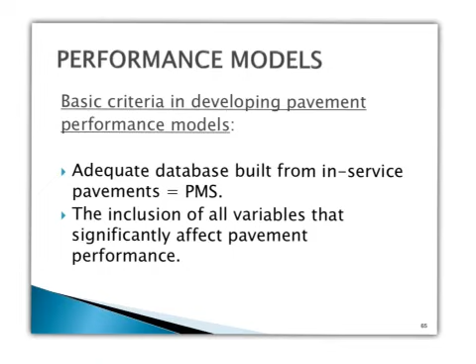Also, when thinking of performance models, we need an adequate functional form of the model—one that meets proper statistical criteria for precision and accuracy. I can't just come up with a model and claim it's accurate and stop there; I need to show the model's performance.

Do predictions based on this model match the true performance? Do the statistics show this is a significant model that can be safely used to predict future performance? What's the R-square? What's the amount of variability built into the model?

Precision and accuracy criteria are essentially about error prediction, and at the end of the day you look at the coefficient of determination, the R-square. If R-square approaches 1, or 100%, the relationship is very strong and has high accuracy for predicting future performance.

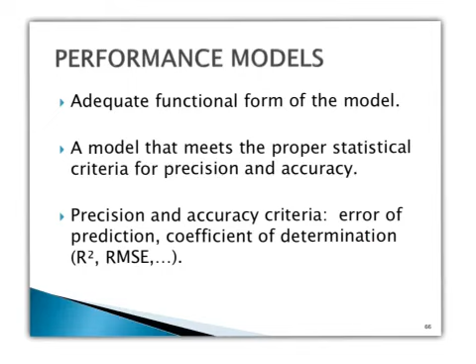On the other hand, if a relationship has an R-square of 0.3 or 0.2, that's a statistically poor relationship, and depending on that, the model becomes questionable and would not be preferred. So while developing performance models, there are two different ways of looking at their development.

The first is deterministic analysis, basically a regression model that predicts a single value of something. If it's based on mechanistic response, it's called mechanistic. So there are two major groups: deterministic and mechanistic.

Another term you'll see in the literature is performance-based models. These typically use a performance response of the pavement related to design, traffic, and environment. They're used heavily by Washington DOT and Nevada DOT, where field measurements of traffic, environmental information, and design thicknesses are taken to develop a performance-based model.

Mechanistic-based models are more robust, using the mechanical response of the pavement to relate to pavement life, such as the NCHRP cracking and rutting models. If you Google NCHRP cracking and rutting models, you'll find extensive work from the last 10 years relating stresses, strains, and stiffness. These are physical components and inputs that let us predict pavement life more accurately than performance-based models.

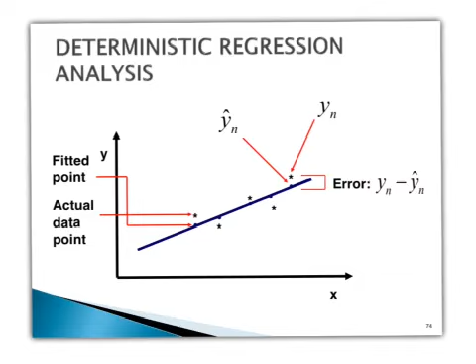Based on the regression line, we need to calculate the coefficient of determination, or R-square. R-square is simply a measure of how much of the data can be explained by the model. If I have a perfect fit, the model can explain every single measured data point, leading to R-square equal to 1. High values are preferred, and R-square somewhere between 0.65 and 0.85 is expected based on actual pavement management system data. We're not going to get a perfect relationship with R-square equal to 1, but something between 0.65 and 0.85 would be really good.

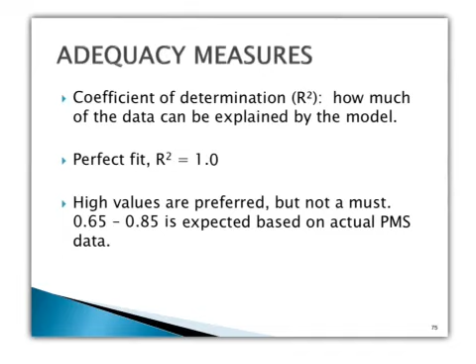Another adequacy measure for how good your developed model is, is the root mean square error, RMSE. Low values are preferred to give an indication that this developed model is really good.

We also like to do verification sections. Those verification sections are not used to develop the model, but are used to develop comparisons of the predicted and measured performance. Let's say I'm having 100 data points to start with. Typically I would use 75% or 75 points to generate the regression model, and then use the rest, 25 points, for verification. After developing the model, I use it to predict those 25 points and see how close or far I am from the true measured values. This verification section should be from outside the database used to develop the model.

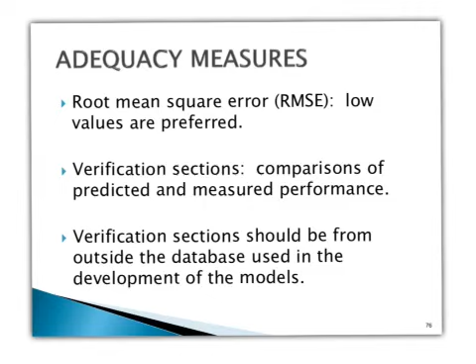One thing also that we need to keep in mind as a measure of engineering adequacy is engineering judgment. We always have to keep this in mind, and every one of you will establish your own judgment based on some fundamental engineering checks.

For example, pavement condition drops with higher traffic or more years - it's never going to go up. Pavement performance, as a reminder, is this relationship going all the way down with time. So it always goes down with time. If I see something going up, that means something is wrong, or there was a major rehabilitation.

Also, pavement condition drops with severe environmental conditions. If I have a very bad winter with lots of snow and freezing and thawing affecting the pavement structure, all of a sudden the pavement performance is dropping more and more for that particular year. So that's also something to keep in mind.

As a general rule, the fewer the number of variables, the better the applicability. A significance test should be conducted to eliminate non-significant variables. Typically at the beginning we don't know how many independent variables, the x's, need to be included in the model, but fewer is better, because depending on 2 or 3 x's rather than 10 makes it easier to come up with an accurate model. With too many variables, each has inherent variability, and the R-square would be less and less.

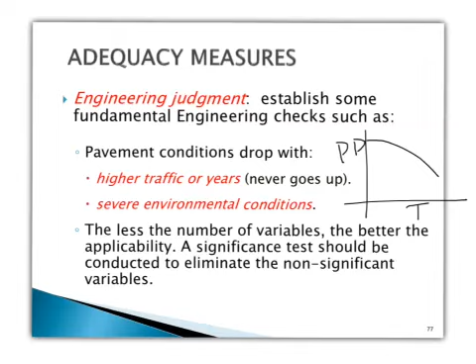This is something we need to keep in mind while developing regression analysis models - we always have limitations on real data. Sometimes we call this the diagonal problem. For example, with traffic we always have light, heavy, and medium traffic, and the corresponding thickness for the hot mix asphalt also has to be between thin and thick. So in the PMS system, with light traffic we design pavements to be thin, while with heavy traffic we always have thick pavement. That's why your data is really along this diagonal, and it's very rare to see a thick pavement with low traffic or a thin pavement with heavy traffic. That's also something to keep in mind.

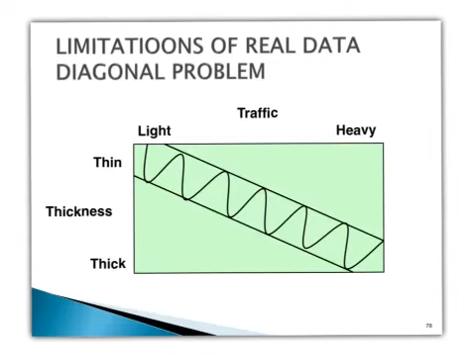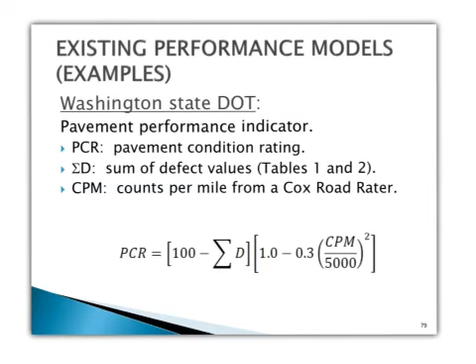It consists of the summation of D, which is the summation of defect values found in tables I'll show you in a minute, as well as the CPM - counts per mile from a Cox road rater. Once we have those two, and you can read more about it on their website, we're able to get the PCR.

This is Table 1 under their system - flexible pavement defect deductions for PMS. They have alligator cracking, longitudinal cracking, transverse cracking, and patching.

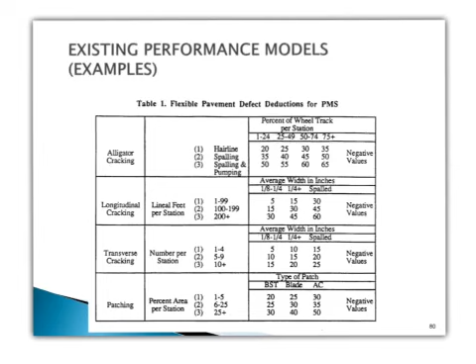Now they show how to distinguish alligator cracking - whether it's just a hairline, or whether it comes with spalling, or spalling and pumping. Afterwards you go to the part of the table for percent wheel track per station. If it's 1 to 24%, that's the deduct value; if it's 50 to 75%, it's 30 rather than 20. All of those are negative values to be considered in the previous equation.

Same thing for Portland cement concrete - the deductions for PMS.

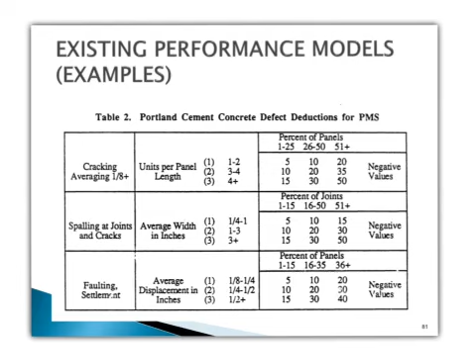Also here we'll talk about basic performance models at the project level. They have this equation: PCR equals C minus M times age to the power P, and this is only applicable for overlays and new constructions. M and P in the equation are changed until the best fit is achieved, typically determined by the highest R-square and the lowest RMSE.

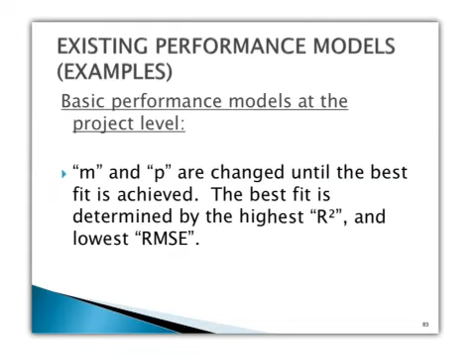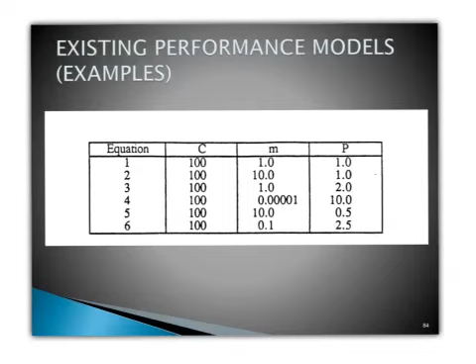This is how to get C, M, and P - they have 6 equations depending on the case. Once you know C, M, and P, you'll be able to get the PCR predictions. Here are the 6 equations. Equation 6 is more typical of the performance of a thin asphalt concrete overlay.

So it's a simple equation, as you can see - it's just 100 minus 1 times age to the power 1. Here you'd see the PCR goes from 100 all the way down to 80, with the corresponding age in years.

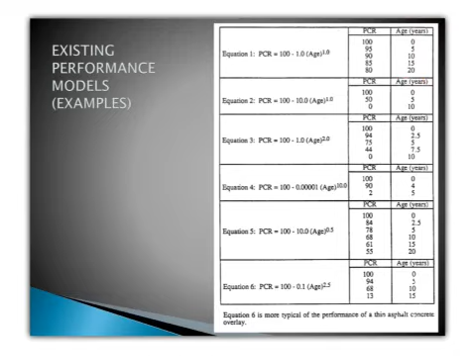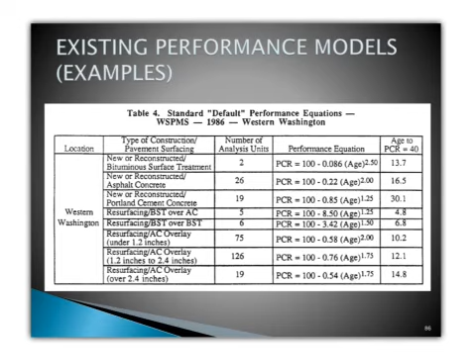Another table under their system, this is the standard default performance equations. You've got one of the locations, Western Washington, and in the second column you see the type of construction or pavement surfacing, and then the number of analysis units. Those are the performance equations, and this is the age to PCR equal to 40. Again, this is just an example, I'm not expecting you to know more about it, but just to give you an idea what type of models can be developed - simple models related to age right away, rather than a long model that can be hard to understand or not accurate.

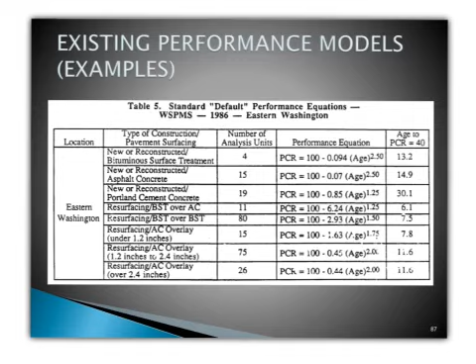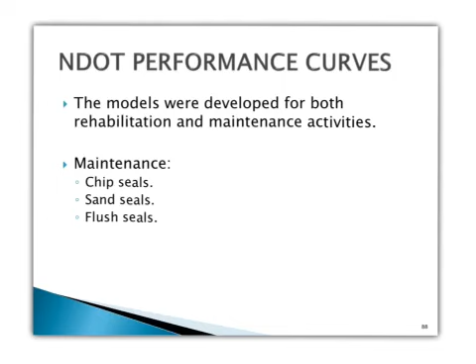Another example here for the performance models or performance curves is from Nevada DOT. Those models were really developed for both rehabilitation as well as maintenance activities, not for new construction. So when I say maintenance activities, it included 3 options: chip seal, sand seals, and flush seals. When it comes to rehabilitation, it included overlays, road bed modification, all the way to mill and overlay.

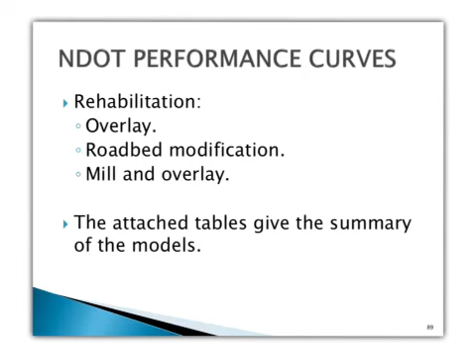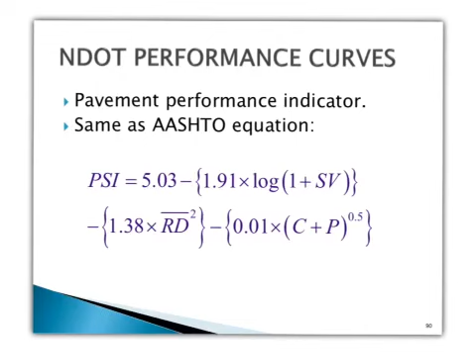The attached tables that I'm going to show you give you a summary of the models. The very first thing here is the pavement performance indicator, similar to the AASHTO equation: PSI equal to 5.03 minus 1.91 times log times 1 plus SV, slope variance, minus 1.38 times RD, this is the rutting depth, minus 0.01 times C, which is cracking, plus potholes, to the power 0.5. This is another example here.

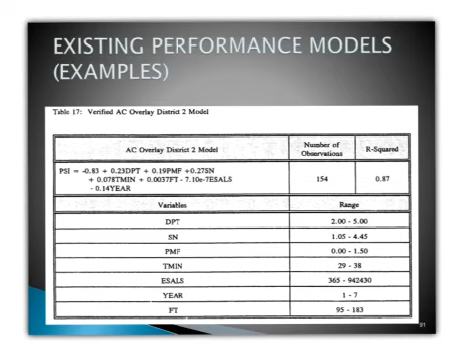This is table 17 for verified AC overlay for District 2 model. Again, this is just an example, I'm not expecting you to know a lot about it, but the PSI equation here is a long equation with several variables, each with its own range. The good thing here is we're showing the developed regression model, and how many points were used to develop it - 154 points - and the associated R-squared is 0.87, which is really quite accurate. So this is a good illustration of the models that were developed, the variables used, the ranges, as well as the R-squared and number of data points - a good summary of all what you need to show when developing a regression model.

Another example here is for a statewide milling model. So instead of just district-applicable models, they were able to come up with one model for the entire state when it comes to milling jobs. So it's PSI, and it has so many variables, along with the ranges, and they used 86 data points to develop this model, and the R-squared wasn't too bad, it's 0.65.

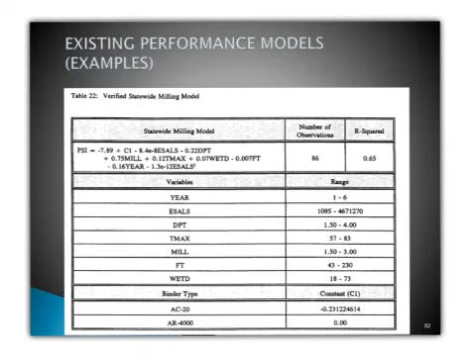Another table here for road bed modification just for District 2. The model again is PSI, in terms of so many variables, including years, ESALs which is equivalent single axle load, SN structural number, the maximum temperature, the minimum temperature, as well as the number of observations - 194 points - and R-squared is 0.79.

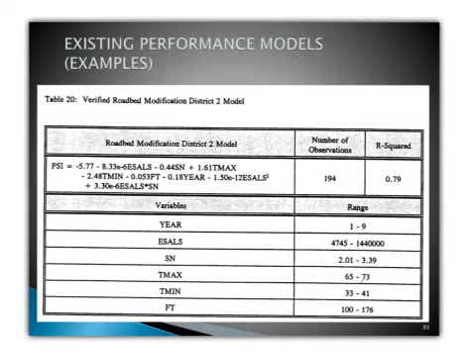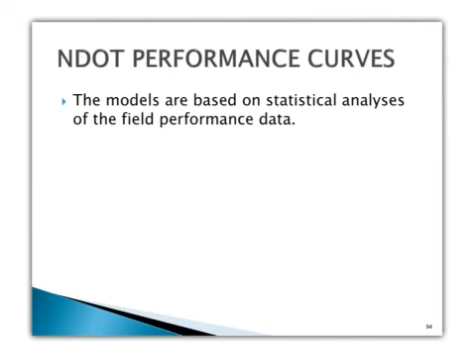As you can see, the models were really based on statistical analysis of the field performance data. So the major goal is for you as a pavement management engineer to keep collecting data either every year or every other year to have a good and reliable database, which is going to allow you to come up with an accurate performance model. Those models that can predict pavement performance life based on mechanistic response of pavement structure due to load and environment are much stronger.

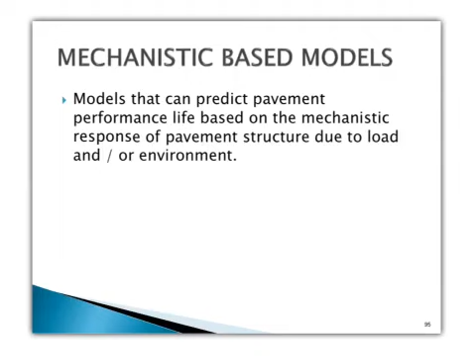So now we're shifting gears from regression models to mechanistic models. Mechanistic models are more accurate, as I mentioned before, and they depend on the true physical performance of the pavement, such as stresses, strains, and stiffness.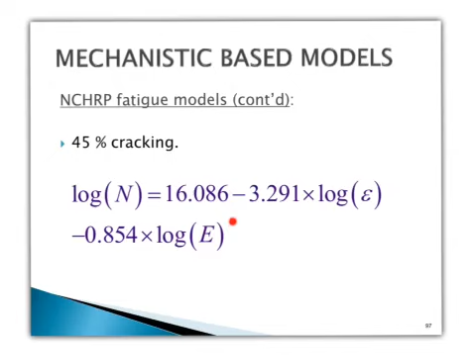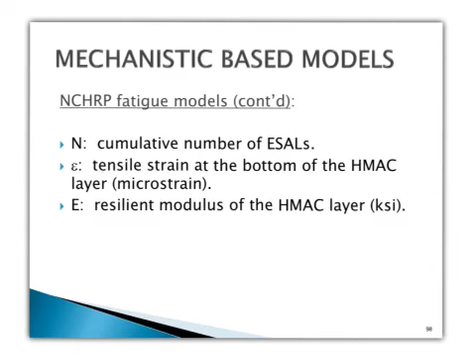So N, as I mentioned, this is the cumulative number of ESALs, or equivalent single axle loads. Epsilon is the tensile strain at the bottom of the hot mix asphalt layer in microstrains, and E is the resilient modulus for the hot mix asphalt layer, measured in KSI.

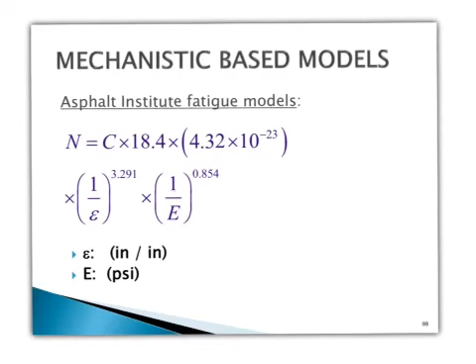There is another institute called the Asphalt Institute Fatigue Models. So now they developed this unique model that has N, which is number of cycles to failure or ESALs, and it's in terms of, again, epsilon, which is strain, and E, which is the stiffness or strength of the hot mix asphalt modulus. C is another coefficient that was defined later on. But as you could see, again, this can be called a mechanistic based model simply because I'm not measuring cracks and other variables from the field. I'm really measuring strain and stiffness and relating that directly to how many cycles to failure.

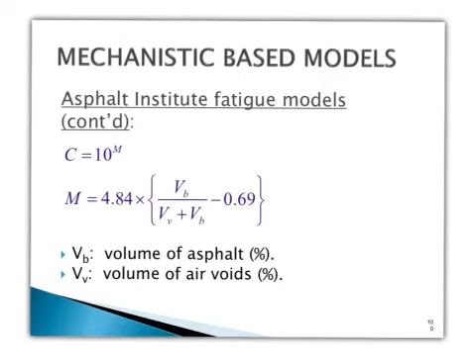So the C variable that we talked about in the previous equation is equal to 10 to the power m, and m is a function of the volume of asphalt, which is VB, and the volume of air voids. Once I know the volume of asphalt and the volume of air voids, I'll be able to predict m, and m now is going to be the power for 10 to the power m to get the C.

Another model for rutting, this time not for fatigue. Chevron, which is an oil company, sponsored some research to come up with a predictive equation for rutting. And rutting also can be related to how many cycles do I need to apply, or how many ESALs do I need to apply on the street till I reach the maximum amount of allowable rutting.

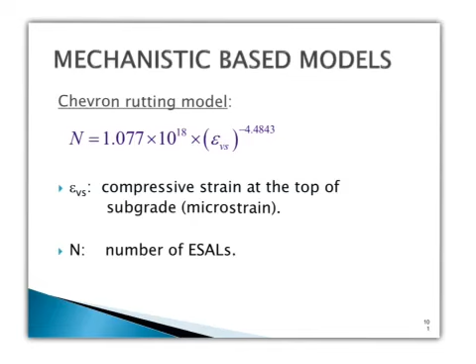So N here is number of ESALs, and epsilon Vs is basically the compressive strain at the top of the subgrade in microstrain. This is just a reminder that the critical strain we use for fatigue is different than what we use for rutting predictions. The strain for fatigue prediction is at the bottom of the hot mix asphalt, because this is where fatigue is going to be generated. While here, for rutting, we are interested to get the compressive strain at the top of the subgrade, where the rutting, sometimes it's very high at this point, all the way to the surface of the pavement.

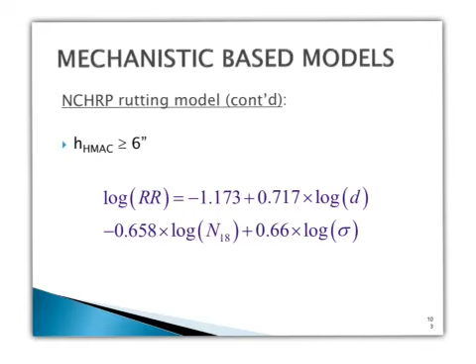Otherwise, I will go to the next page to see the other model, which is applicable for hot mix asphalt thicknesses more than 6 inches. As you could see in this model, it's trying to predict the rutting. Those are the variables that I mentioned or showed in the previous two slides.

RR, this is the rate of rutting, which is 1 times 10 to the power minus 6 inch per repetition. D is the surface deflection. N is the number of 18 kips, which is the ESALs, times 10 to the power 5. And what's the most important thing, and this is what makes this model mechanistic, is sigma. Sigma is the compressive vertical stress at the surface-base interface. So once I am interested to measure the vertical stress at the surface, between the surface and the base interface, then I can correlate that to the amount of rutting that happens to the surface.

So with that, this was just a summary of some performance models, either regression models or mechanistic models, that were developed under NCHRP or Chevron, or the two DOTs that we talked about, Washington DOT and Nevada DOT. So with that, we finish Chapter 6.